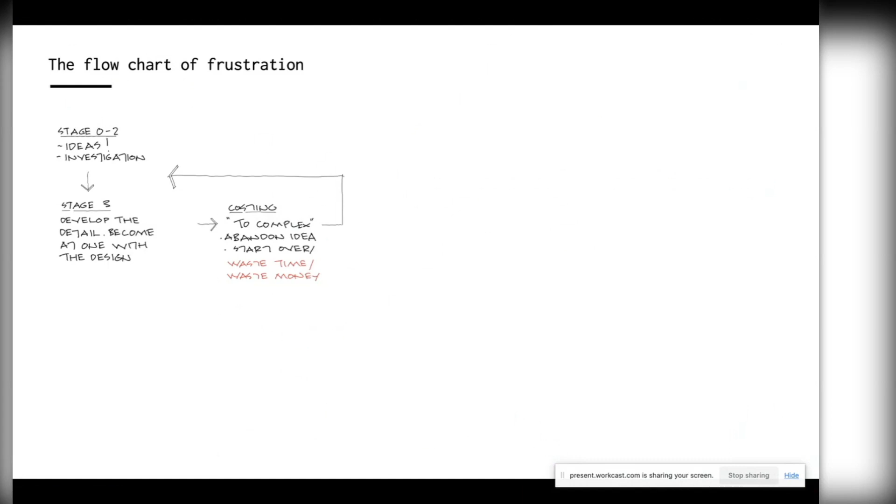At that stage, you often find a project will go for costing, for example. It doesn't matter who costs it or what organization or background, but there are many examples where people will say, 'Oh, it's too complicated, we haven't really explained your ideas, it's too complicated.' You have to abandon the idea and start over, which is a waste of time, a waste of money. But if you go past that stage to stage 4, you then have a deep familiarity with design.

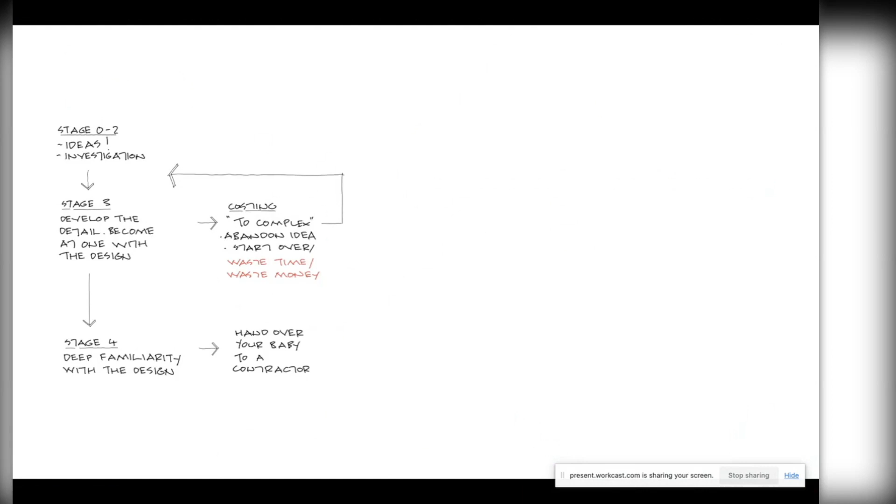At that stage, you hand over your baby to a contractor. So here are some of our pet peeves. A poor contractor will spend time relearning the design, he'll replicate any 3D model you've pulled together, there'll be questions, there'll be the inevitable wait for answers, we'll spend ages checking the contractor's model. You'll get comments such as, 'I don't have Rhino, can I have PDFs, please?'

Which is a waste of time and a waste of money. You get the same - it's too complicated, you have to abandon the idea and start over again. Once you've gone through all those hurdles, even if you manage to convince somebody with the sheer force of will that this is buildable and it is possible, you get to build it.

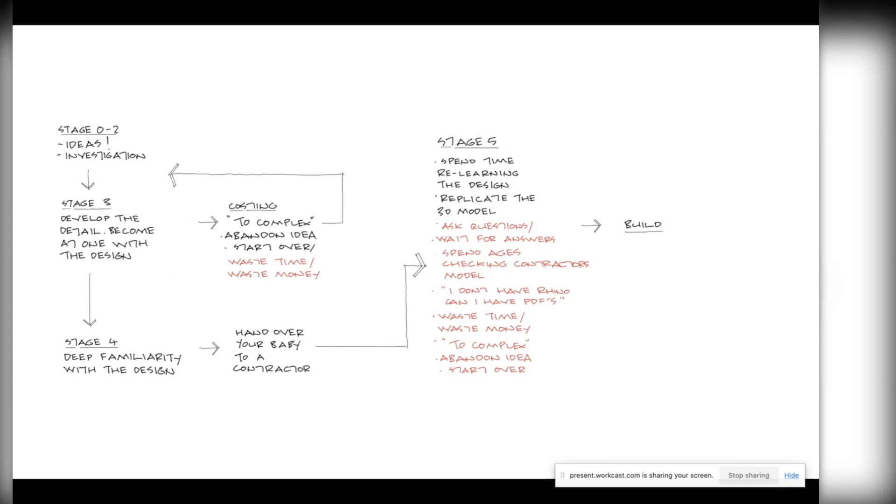But then you get the further complication on some projects where people say, 'But I'm not a contractor, I'm a self-build, or we're only students, or I have very little money.' So there are all sorts of hurdles where the traditional way of doing things slightly falls down - the traditional way of engineers producing information, handing it over, and then expecting a contractor to absorb that very quickly these days, and then to produce fabrication information which reflects your design intent.

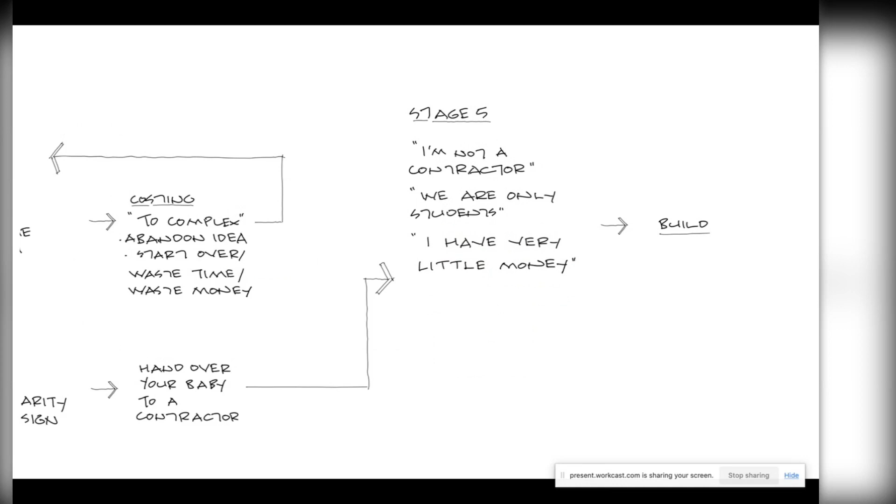So that's why we think democratization of building, through the application of technology, means the pitfalls that you see later on in the design process can be ironed out. I'll start by talking about some more funky digital projects, which explain some of the concepts, get those out of the way.

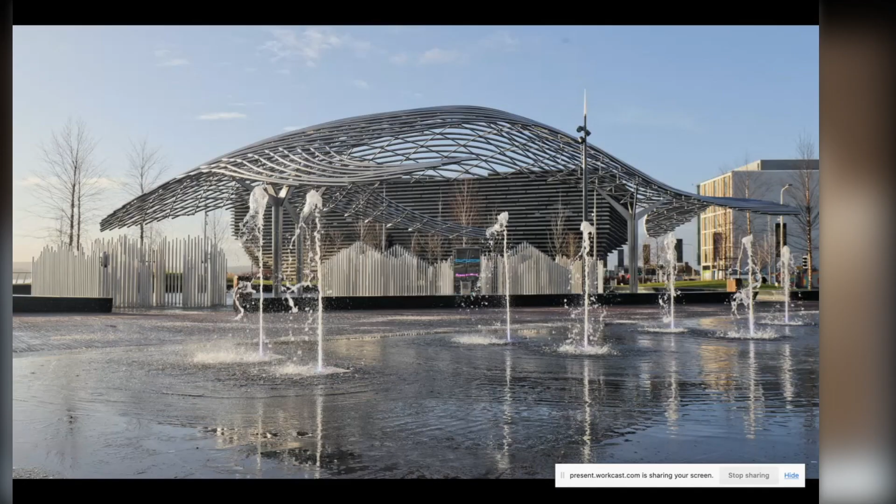One project we were involved with last year - this is the Tay Whale for an artist called Lee Simmons, in Dundee, opposite the Victoria and Albert Museum. These are examples of projects where you're working for a client body that does have money, and a contractor who is au fait with some of these techniques. I wouldn't say they're no-expense-spared projects, but these are the big profile, or high profile, design projects.

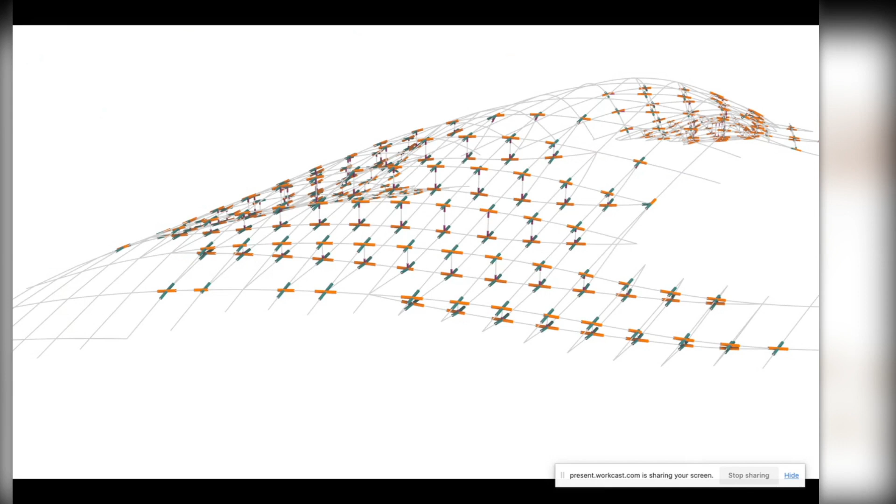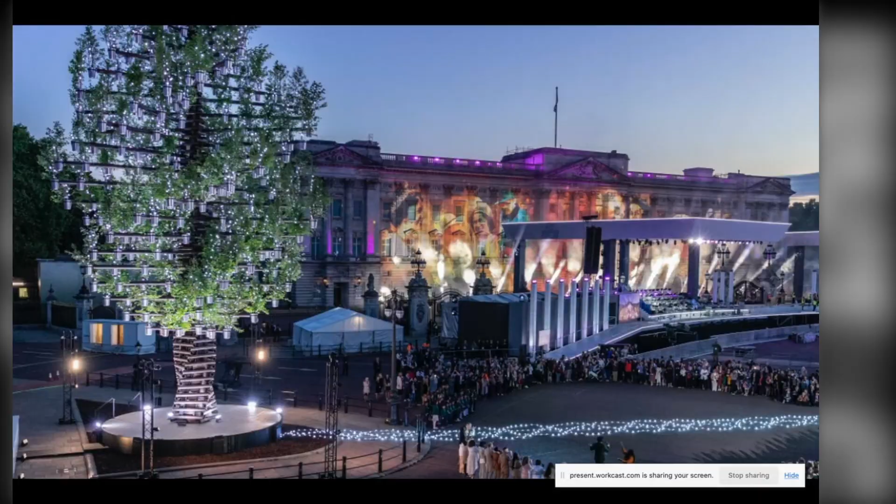Another example of a complicated project where techniques that have been learned feed into the everyday and enable this democratization was a project we were lucky enough to be involved with for the Queen's Jubilee last year, the Tree of Trees for designer Thomas Heatherwick, which was the primary beacon across the country, lit by the Queen, went around the country, and then the Tree of Trees was lit up at the end.

It was a very fast-paced project. It involved lots of computational techniques to prove it stood up in the time, but also to enable us to produce the information that the contractor could build with very quickly. So we produced all the cutting files and the 3D elements from our model that the contractor then used to actually cut the elements that went into the structure.

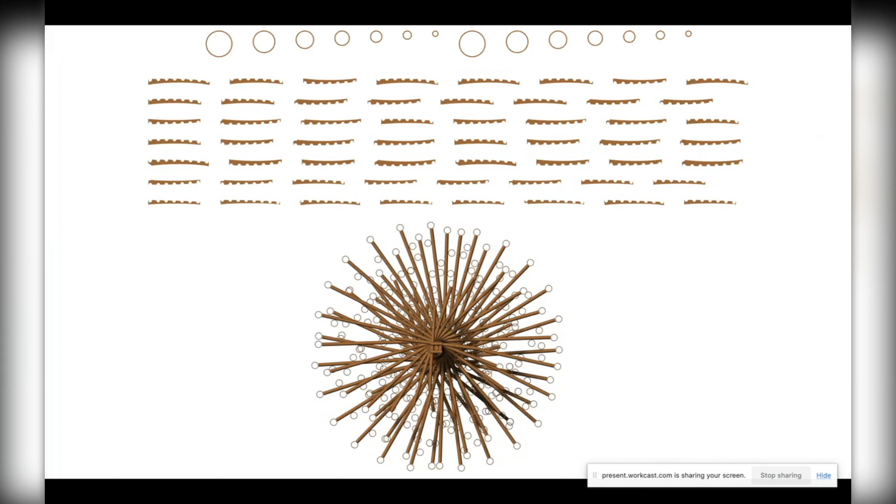There's the fabrication as well. And this is a great example where you have to do this sort of thing sometimes - we think, and we're quite prepared to do this sort of thing, when the deadlines are extremely tight.

Another example - not unlimited budget, but a project with a certain budget and an experienced contractor, which was still extremely difficult to build, and where we learned a lot, was Goodwood Festival of Speed in 2022, which has the proud boast of being the world's longest tensegrity cantilever. We had a matter of 3 months to actually come up with a design and build it.

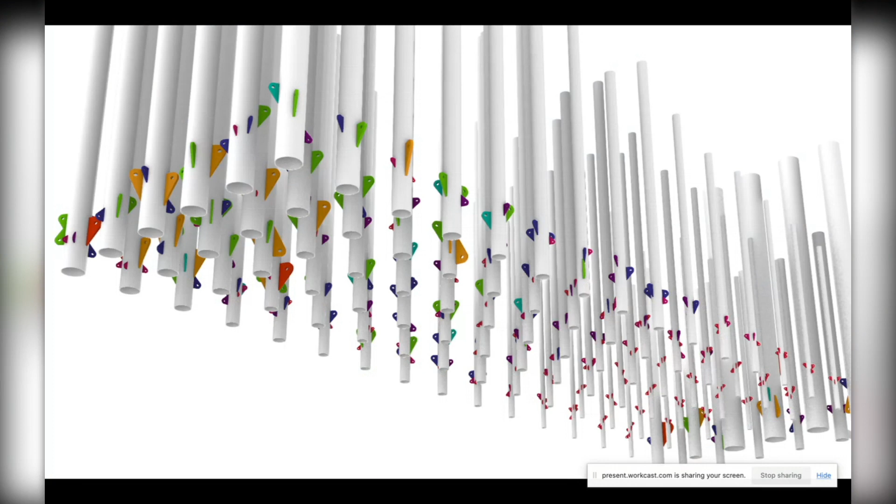So the full array of digital techniques we use - every single connection was designed automatically within one computer script. All the fabrication drawings were exported by us from our 3D model, again using a single computer script, all of which saved the contractor a huge amount of time.

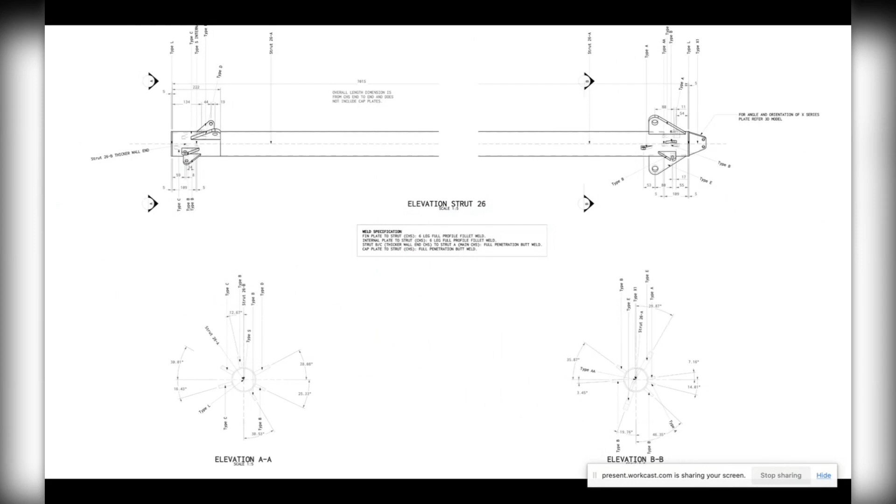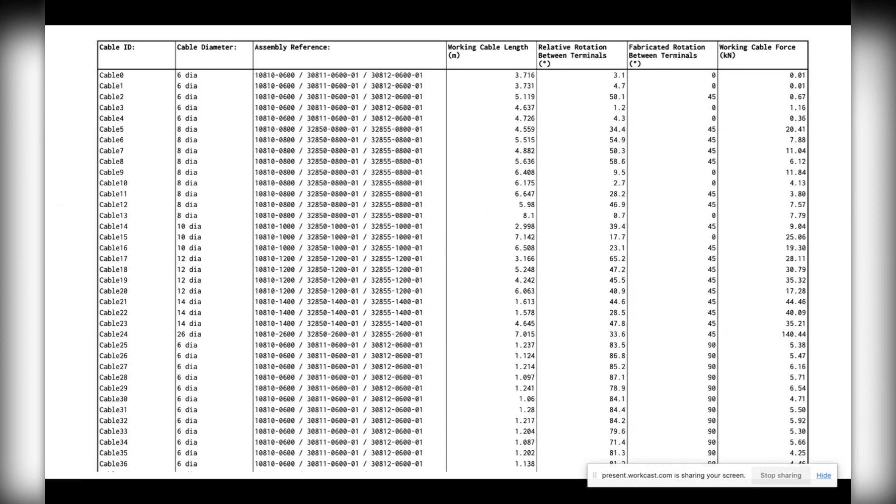Every plate element was labeled and automatically exported. Every cable, again, was labeled and then automatically exported to the contractor.

These are all techniques that we've really got a handle of, I think, which are absolutely necessary in the design and delivery of some of these quite complicated projects. So there's been a real investment in computational design, and it really pays off from that respect.

And then just a quick description about some of the tools that we use. The ubiquitous one is the 3D modeling software Rhino with the parametric modeling plugin Grasshopper. This has pretty much become, I suppose, the common language of engineering computational design.

There are people out there who hold other platforms do an equally good job - they may or may not be right, but this is, I suppose, the common platform that allows us to develop 3D models, to plug in real-world physics, to plug in nesting software for CNC cutters, to manipulate geometry to make it simpler, to include structural analysis within the model to get instant feedback of how things react when you make changes to geometry. So if those of you who haven't delved into the world of Rhino and Grasshopper, I recommend you do, because it's initially quite an overwhelming world, but it's one which does actually pay off.

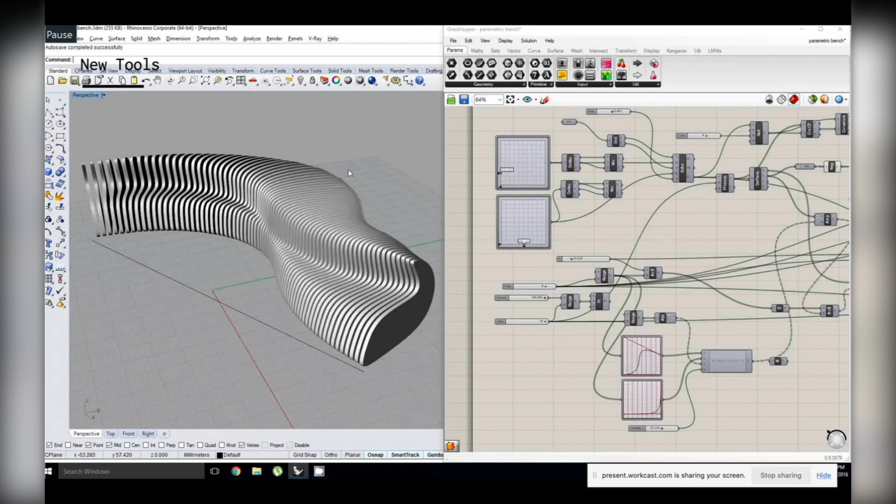The advent of relatively cheap and cheerful CNC cutting machinery or simple laser cutting - Ashley and I were talking about this before this presentation, about how easy it is now to get 3D printing and CNC cutting on a small scale that people could actually use to produce viable, useful elements of a structure. So part of our role is then to say, how can we take the design that we produce and turn it into small elements that the man down the street in the warehouse who has a CNC cutter can produce? And then you assemble those elements into what could be quite a complicated or unusual structure.

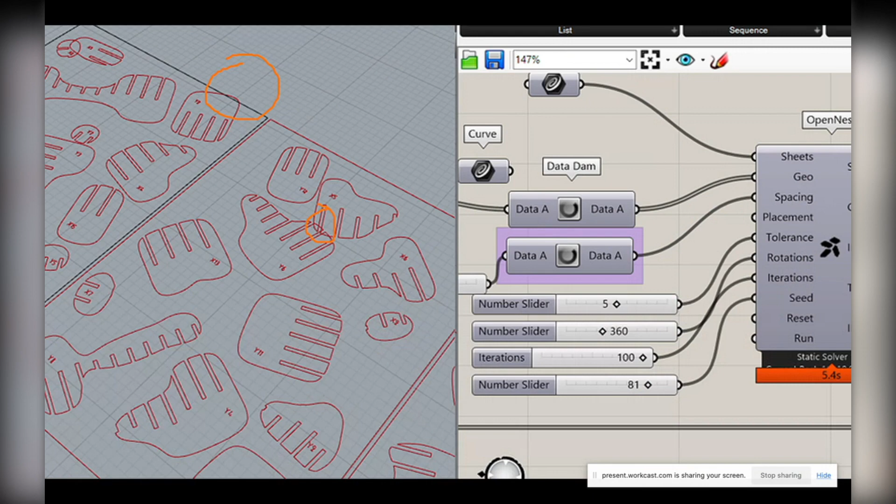So it's embracing the maker's movement, the small scale local manufacturing. I talked about nesting - this means that we can take elements from the design and put them on the sheets, then send it to the CNC chap, who can produce the elements himself, and then we can literally take them to site and assemble them ourselves.

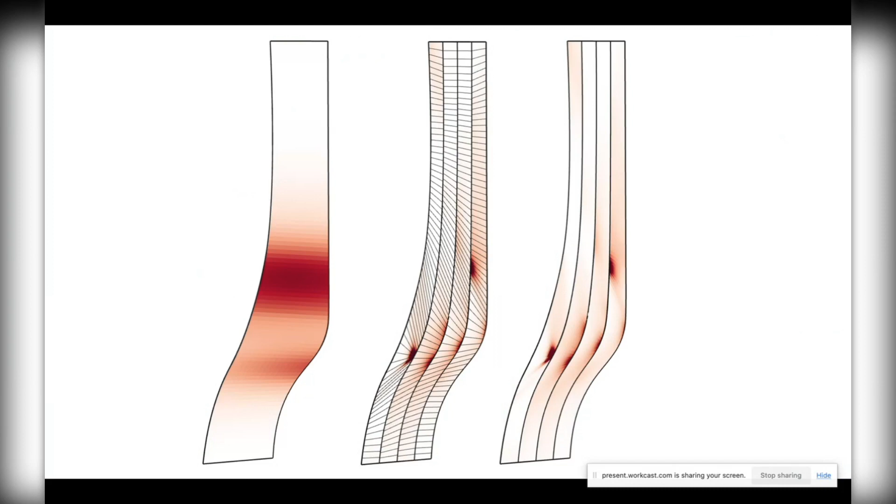Essentially it means using the power of digital modeling and computational techniques to take surfaces which, in this case, double curved on the left - the pattern shows the degree of curvature - and split it into simple flat elements that represent that double curvature, that don't require the services of a shipyard or a boat builder to make a complex three-dimensional form. They can be split into simple parts that the chap down the road with his CNC cutter can produce, and then we can bend them about one axis and fit them together, and the shape of the pieces means they come together in a way that quite accurately represents the double curved surface.

This was an actual project we were working on for the Qatar World Cup. The architect's original intention was this double curved surface at the back of the structure, where it became obvious that the budget was too low and the time too short to go out to a Dutch shipbuilder, for example, to procure double curved plates. So how can we split that double curved surface into flat strips, or strips bent about one axis, which then pull together a pretty good representation of the original three-dimensional form.

That was the final structure. We're still trying to get photographs at the back, which is really the funky sculptural part. But it made the difference between this building being built or not.

So again, this is an example of a quite well-funded project. But again, it's an example of how it wouldn't have been possible to do this very interesting double curve geometry if we hadn't been able to prove it could be done for a relatively low budget.

We did the same thing for a work of art in Marble Arch in London, where we took the artist's original intent - the artist being Lee Simmons - of double curving stainless steel plates which whooshed out to the ground in a sort of plant-like form. But the original was too costly, it couldn't have been built - it was double curving on those plates, super expensive. So again we've broken everything down into single curved elements cut from flat sheet, which again made the difference between it being built or not.

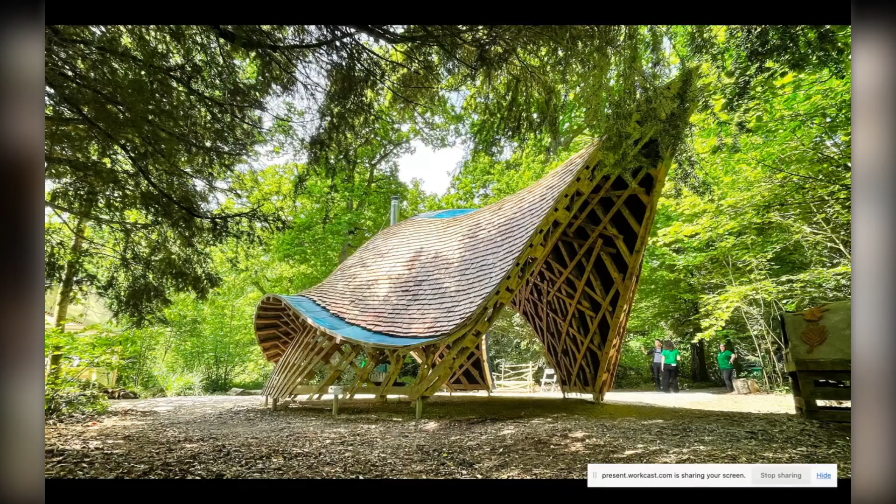So to show this in action, I'll go through a series of projects, if I may - some very quick examples, recent examples.

This is Westonbirt Arboretum with architect Piers Taylor, where again it's a complex form - elements which are bent and steam bent - and then the community comes together: local schools, local action groups came together to help build this structure. The guidance they were given and the elements themselves were all split into simple steps and simple components using our 3D models and the tools we had, so a non-experienced, non-professional contractor could contribute to the build of this project. We were in charge of producing those elements, or collaborating in producing them.

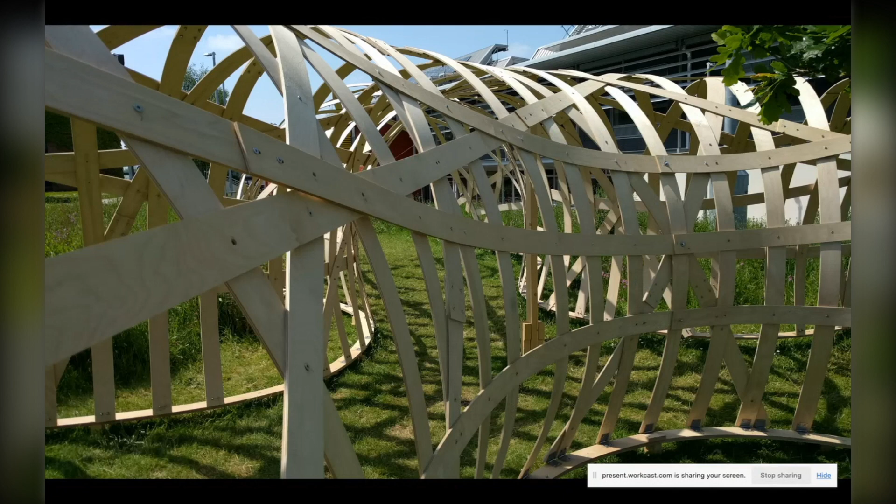That built on the work of a smaller scale project a couple of years ago at the University of West of England, where a relatively funky three-dimensional curved shell form was designed by architecture students for their end of year show. But they only had a very limited budget - they could afford a saw, they could afford some bolts, and they could afford some 6mm ply, only in flat strips.

But we were able to develop software which broke down that curved surface into those flat strips, which when bent and pulled together and then connected with bolts would form this really interesting double curved surface.

So they were able to do this for the end of year show. It was tremendously successful. It went a bit saggy after a few months, but it's not meant to be up for that long. But it's a great example of what you can do with the budget if you're prepared to do a little bit more as engineers, working with the digital tools you have.

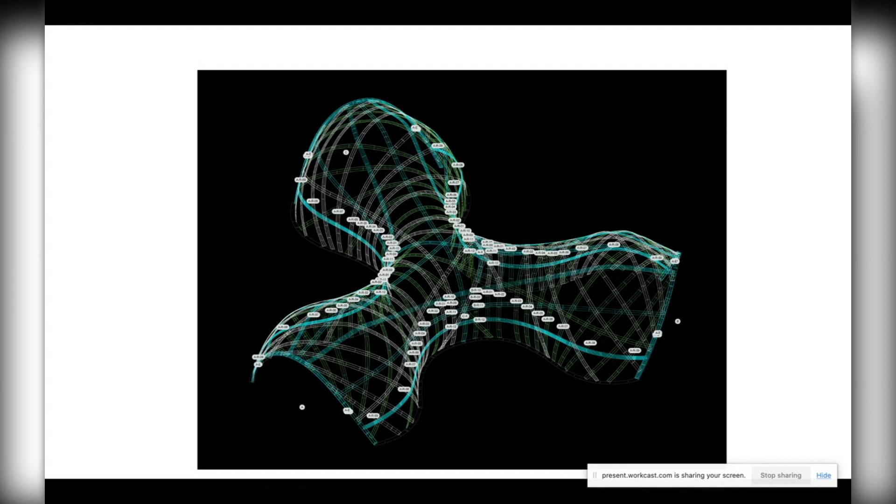We are working with a very enlightened concrete contractor in the west of England. I should say calling him a concrete contractor isn't really a fair description - he's actually a waste-to-energy supplier who owns a concrete company, and he's looking to develop concrete shells around his waste-to-energy plant in order to house workshops, production facilities, or growing tomatoes, using the spare heat from the plant.

So as a prototype for one of the concrete shells, we've worked with him defining literally clay molds from the ground that make the shell, and using augmented reality to set up the reinforcement in the shell.

Although he owns a concrete contractor, the contractor itself is a very traditional organization, used to beams, columns, and slabs. So presented with a series of concrete shells, it's a massive learning process for them.

Being able to set up the model in augmented reality showed them where the reinforcement should be. This was also reinforced with a textile reinforcement to show them where that should go. And before that, showing them how to shape the clay, the earth mold that makes this shell, was a fantastic learning experience for us and for them.

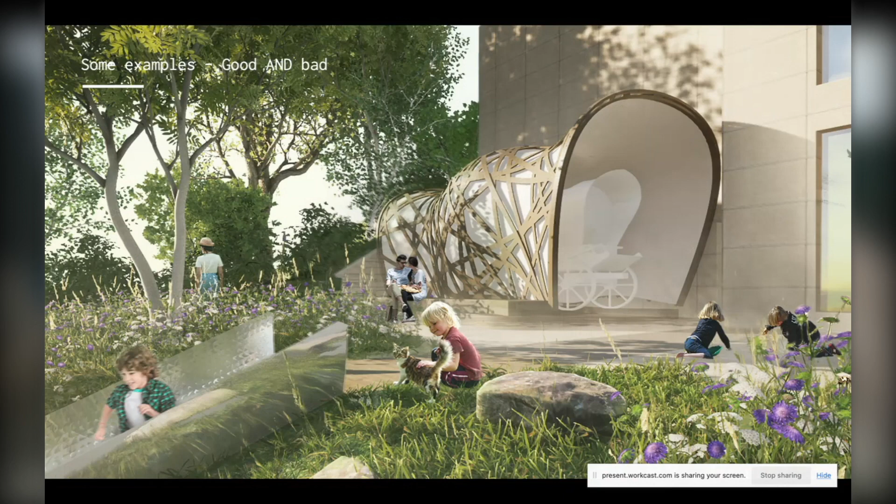So that's a snapshot of some more grounded projects. I was a little bit more controversial and go from examples of good projects and bad projects, because I think the flowchart of frustrations is all very well, and going out and pushing scope as an engineer is all very well, but actually there are some bad outcomes to this, or there can be, and there are some things to watch out for, some things we've learned along the way.

So there are some good examples and some bad examples. And I'll do this as a series of projects again, because I think this is best illustrated by real-world projects.

Now I talked about grounded projects - this is a typical grounded project. This is an extension to a house. Admittedly it's for a member of the aristocracy in a very expensive village somewhere in the southwest, but it's an extension to a house. The architect wanted some quite unusual angles.

It was very difficult to actually deliver the elements for the build through a very tight series of alleyways behind the site. So it all had to be split into small components, and also the contract was held to a very tight budget. So there's a rear view of the extension.

The approach was to break it down into a series of frames - hybrid plain sawn timber plywood portal frames, which were then clad in a more conventional timber frame. We developed the 3D model, which was actually an output from our analysis, so we developed this into a solid 3D model. We then generated the cutting patterns for the ply elements that sheathe the outsides of the portal frames, and then we gave the contractor a set of instructions on how to put this together.

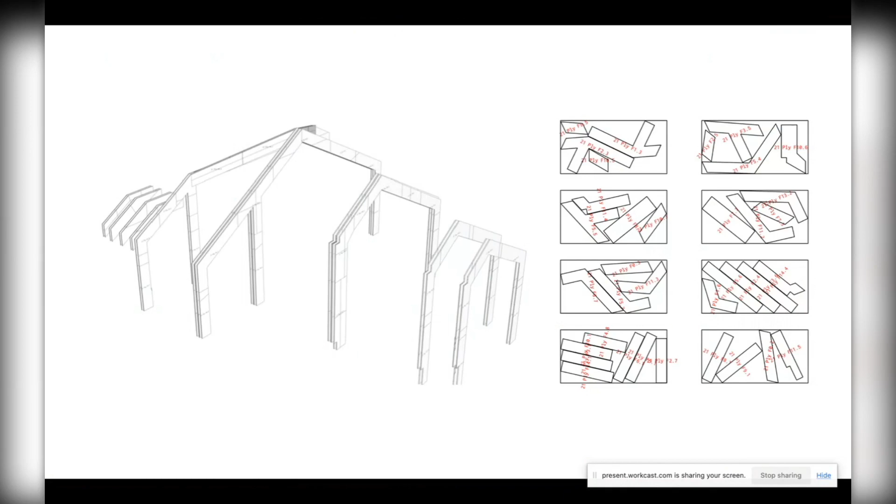And I think this is a good example. There was a contractor - we didn't have the frustration at stage 5 of someone saying 'I don't have any money, I'm not a contractor, I'm just a student.' There was a contractor, but he was able to get this built extremely quickly because we were working with him, going further than the traditional scope for an engineer. There's a picture of it being built.

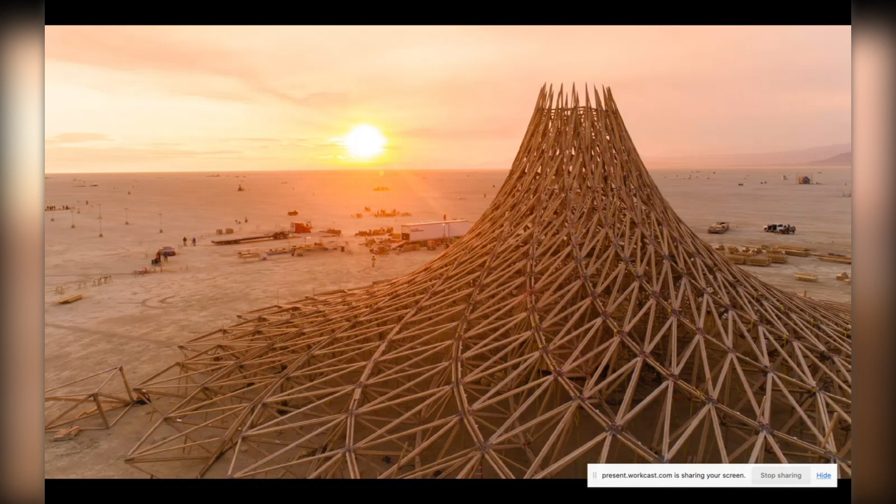Another example, one that I may have used before in presentations, but it's a good example of democracy and, in some ways, the ultimate example of democratization and building in a social sense. This is a central temple for Burning Man in 2018, a structure called Galaxia by architect Arthur Mamou-Mani.

I don't know if people are aware of the Burning Man festival, but people come from across the world, take lots of drugs, hang out, take all their clothes off and run around naked, as far as I can tell. But it's a spiritual space, and you're meant to leave the desert untouched. There isn't the traditional contractors and people with huge machinery helping you build these things. You've got to build them yourselves.

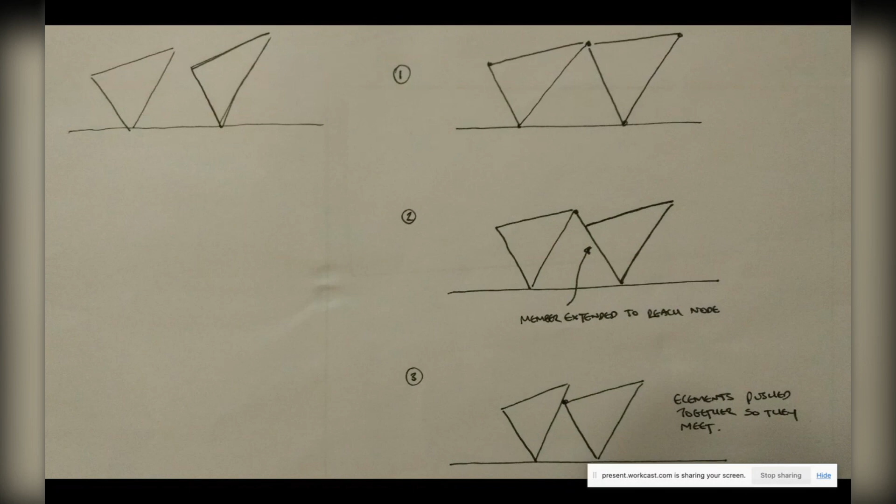So this tremendous structure, which is 50 meters clear span, a spiraling tent-like structure, had to be built with literally inexperienced volunteer labor. We went for an exercise of really splitting this down to quite simple elements - triangles, prefabricated triangles which could be connected together. Really, what could they produce in a cutting shop without a contractor leaning over them for help? So really simple triangles connected together in a simple way.

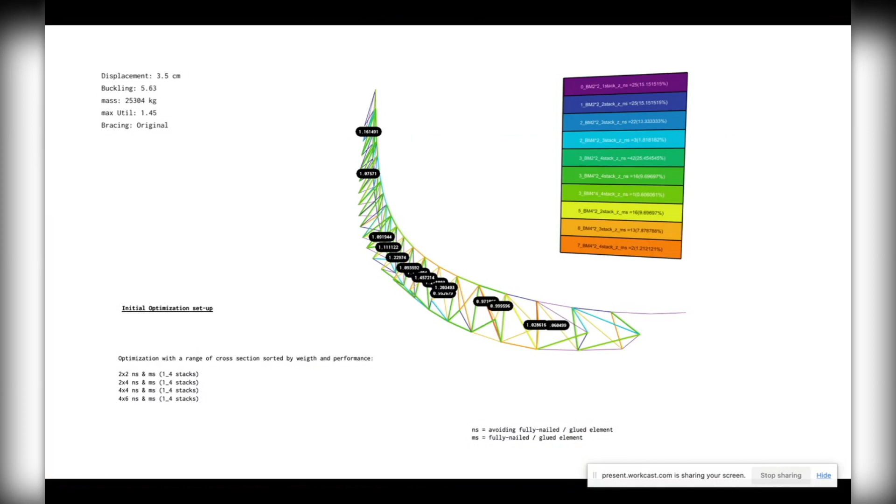We did loads of engineering optimization, which split it into different elements and different sizes in order to reduce the material - the sort of thing we like doing. Actually, in this case, it was a bit useless because it meant the elements were all different. So a better approach was to use as few different sizes as possible, have more repetition, so it was easier to build. We ended up with literally just 2 sizes of timber, arranged in the best way we could.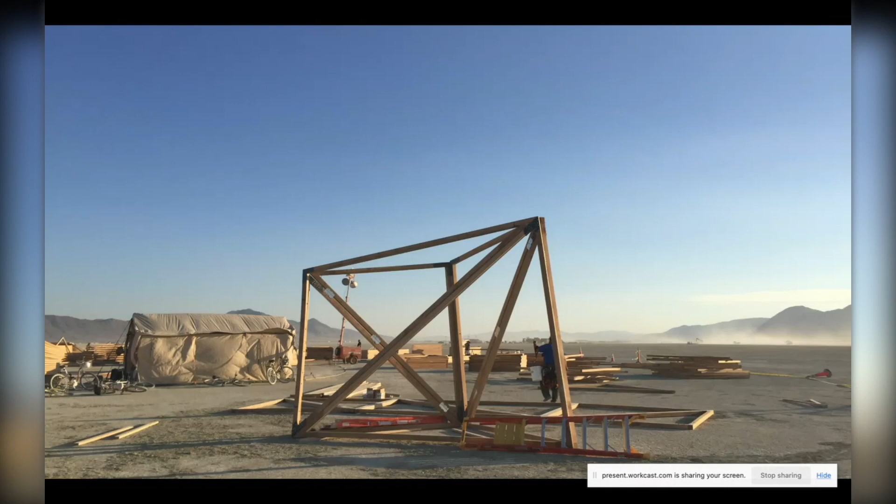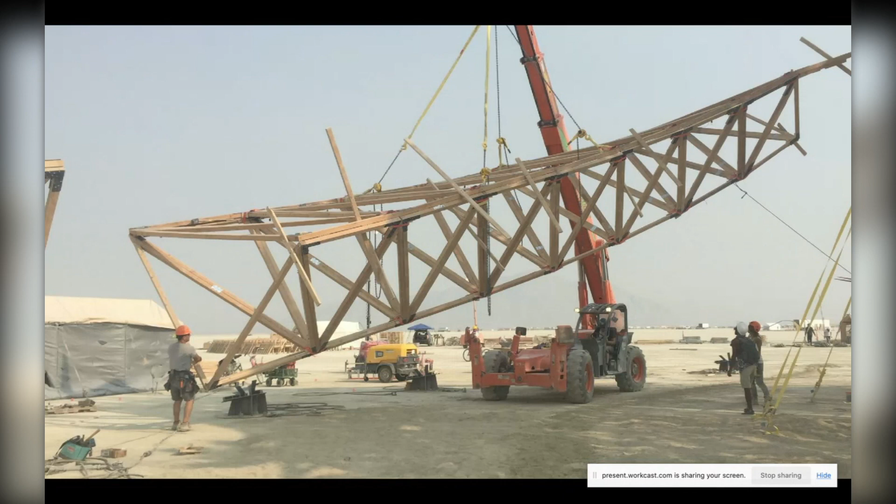So fabrication started, and this is the desert - you can see the concept of the triangles bolted together. They built the banana trusses, and this was some of the few pieces of kit they did have - these long spiraling banana trusses - and they did it. So this was volunteer labor.

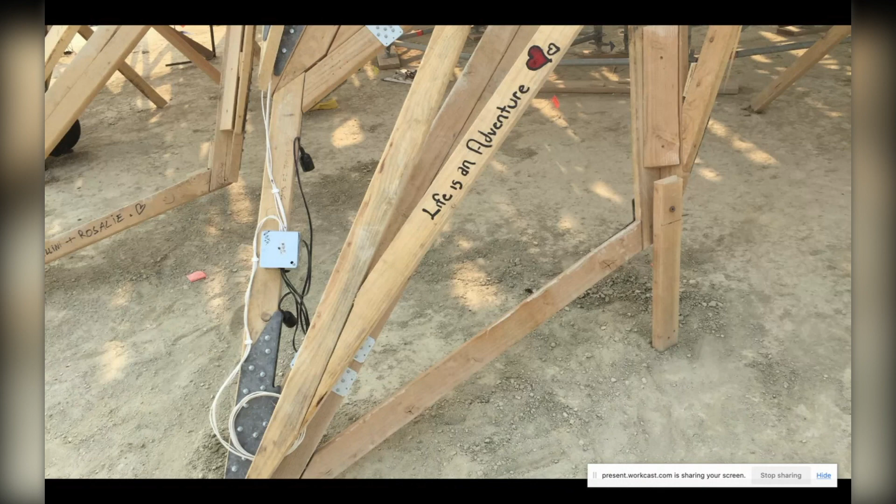This was architecture students, people from Google, people from Boeing - people who hadn't had any building experience, but were able to build this tremendous structure. People left dedications to loved ones, messages. It's a very spiritual space.

You can see the top part of the structure is built first. Maybe they should have used some experienced contractors at this stage, but they did it. So here's the team that did it. This is the ultimate example of social building.

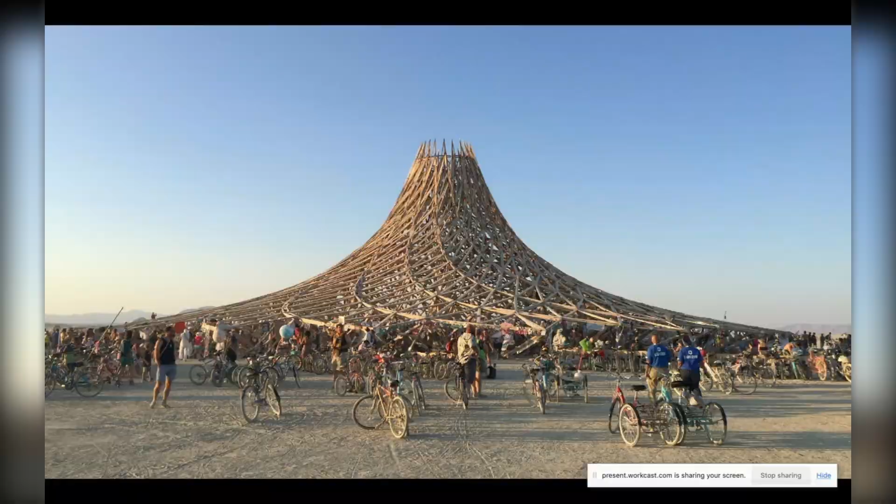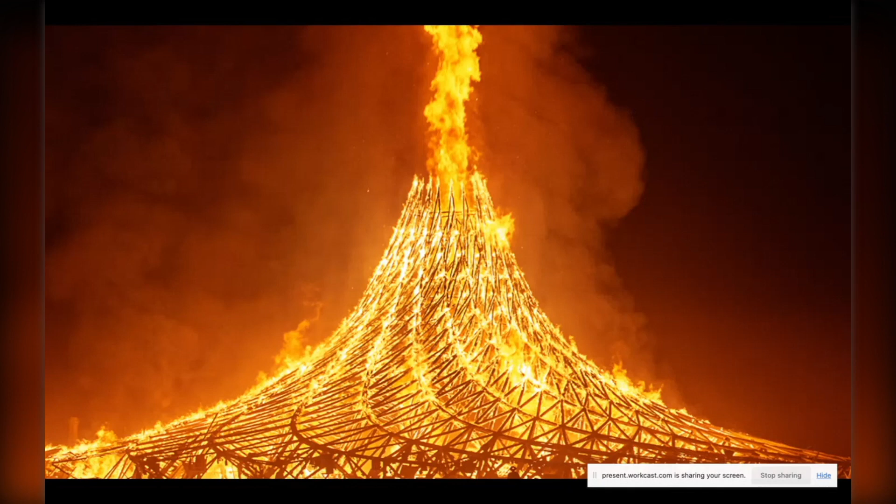Looks tremendous. Looked tremendous. The inside looked amazing as well. There was a great spiritual space. And I say 'looked' a lot because the story is it took us months to design it, it took them a month to build it, and it was up for 4 or 5 days, and then they burnt it, leaving no trace. So it was something which made a mark, but not a permanent one upon the desert.

Another example - I'll rattle off a few good examples, and I'll talk about the bad examples. This is the steampunk central structure for the Architecture Biennale in Estonia. Fantastic swirling, interlocking structure - that was the original architect's vision.

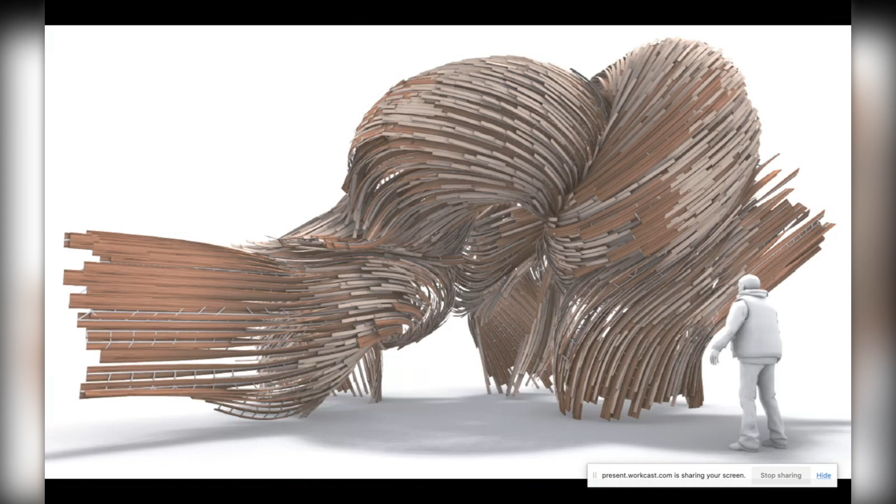It's a bunch of architects from the Bartlett School of Architecture who teamed up with the same augmented reality people I talked about before, Fologram from Australia. So it was their joint design. There's all the normal 3D modeling and structural analysis, but what was really clear is this couldn't be built.

Again, it couldn't be built by a contractor because there was no budget for a contractor, and it couldn't be built by a contractor because it was too unusual for a conventional contractor to understand. So the way it was built was using one of these primarily - this is a Microsoft HoloLens.

This is an augmented reality set which flips over your head, and you can see the real world in relation to the 3D model. So you can see what you're trying to achieve when you fabricate something in relation to the real world. So here's an example of that.

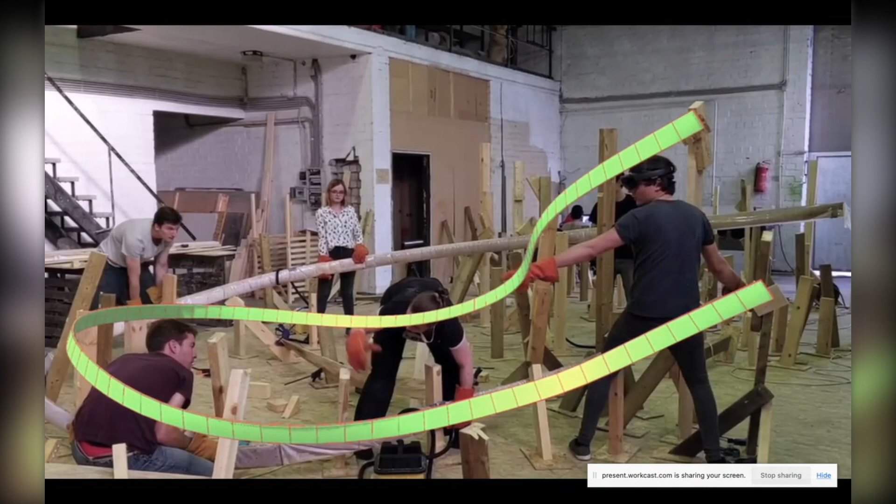Here's an example of the timbers which made up the structure, which needed to be steam bent. Here's them being steam bent and pulled into the right position. That kind of greeny-yellow shape is essentially what they're trying to achieve. So the guy with the HoloLens - or rather, the hologram - can say pull left, pull right, to match what they're trying to achieve.

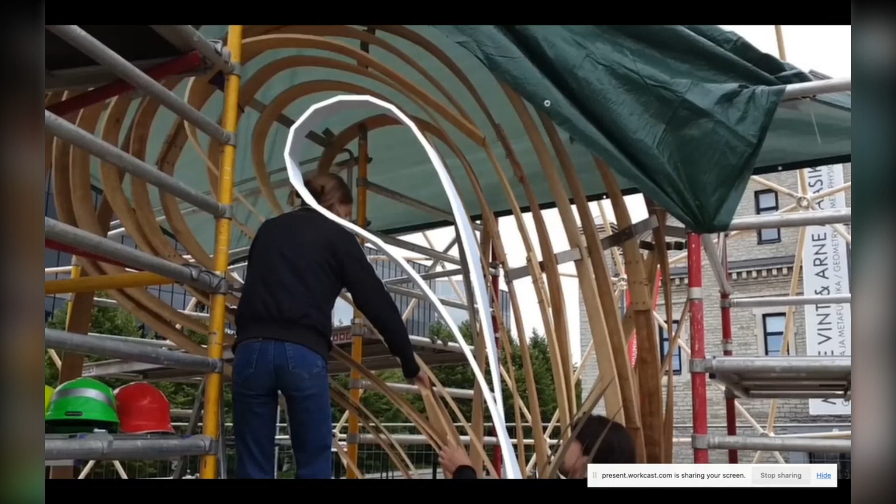And they used the same system on site, so they were able to build this - knowing what element goes where - using the system to great effect. Here's an example of what somebody could see as they were building it. And they did it. This would have been impossible any other way, I think.

So it was a tremendous use of technology, tremendous use of computation, and it was democratic again. This was built by the architects themselves for a very limited budget.

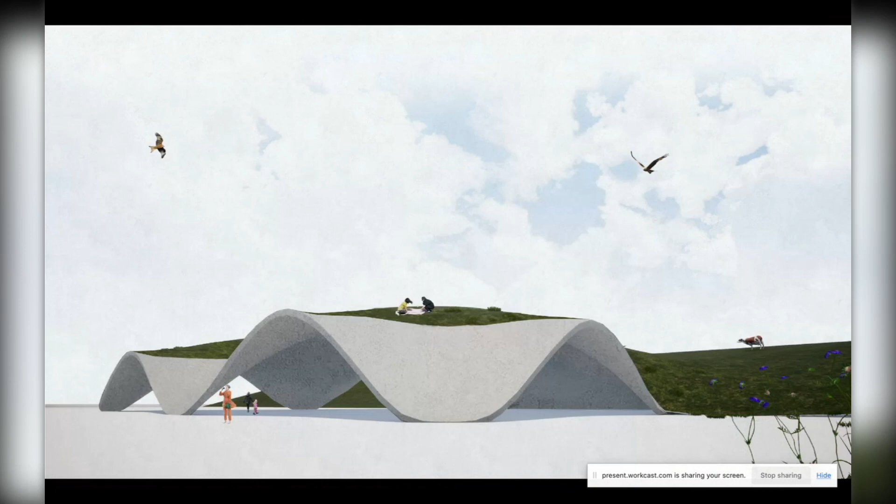An example of a picture. And this has led on to other projects.

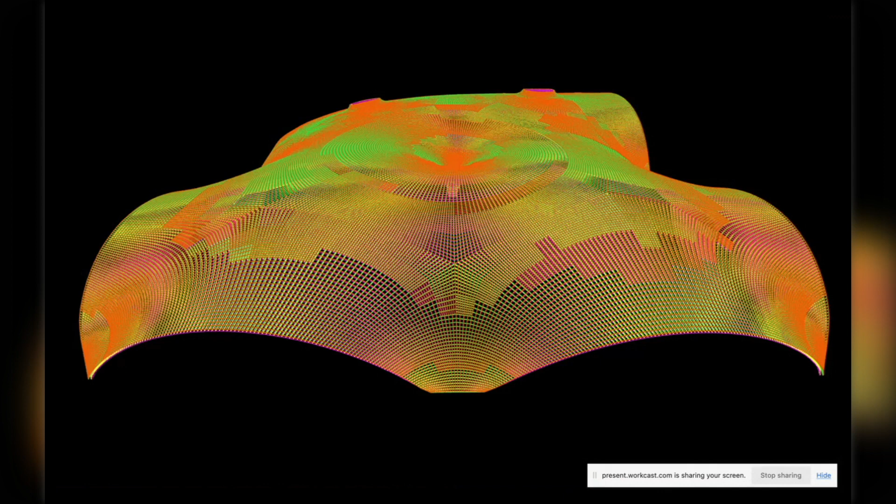I mentioned the concrete shells that we're developing with a contractor energy supplier in the southwest. This is one of the shells. As I said in the prototype, what they want to do is set out the shell, the mold, the clay mold, and the reinforcement. Here's the reinforcement pattern using the augmented reality system.

Another more everyday project, this was a contemporary house in the southwest called Park Cottage. It's up for an RIBA award soon, so we're hoping it gets one, obviously. The centerpiece was this reciprocal Zollinger roof. It's an oak Zollinger roof of very limited length members which interlock to make a robust roof structure.

Some of the comments that we had when we were first showing this to the contractor were along the lines of, why don't you build a steel frame and just hang the timber from the steel frame? And we said, well, no, but that's not what we're trying to do. This structure is, yeah, a robust structure in its own right. We don't need to hang it.

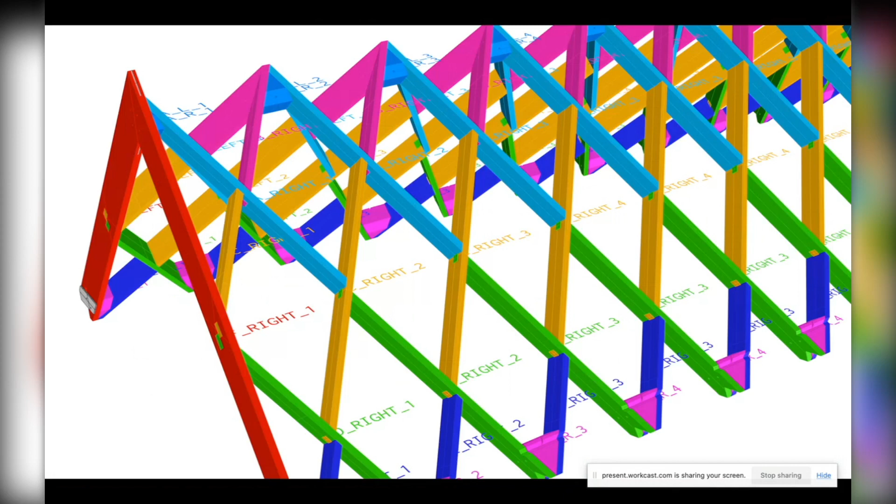So the way we were able to demonstrate to the contractor that this was possible was by taking on the responsibility ourselves as engineers in doing the CNC cutting file generation for the members, the CNC cutting for the plywood panels which sheathe the roof. We developed a full 3D model. All the elements were modeled by us.

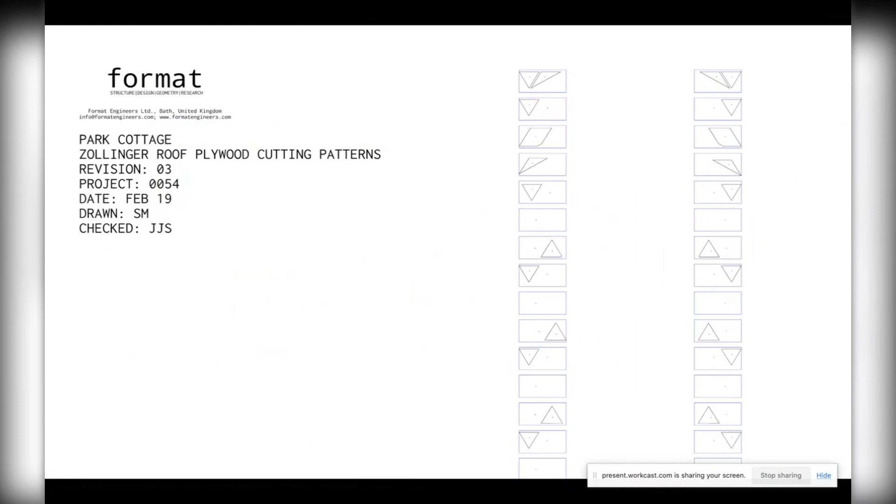All the plywood cutting patterns were generated by us, and this is one of the bad aspects. It's got the world's worst nesting into panels here, complete waste in some ways of plywood, mostly due to the architect's insistence of all the grain lining up in the same direction of the plywood. So it was a very inefficient way of nesting onto plywood sheets. But we did all that. We protested, but we did it.

It was part fabricated off-site, brought to site, crane in position. It all fitted, and it looks fantastic.

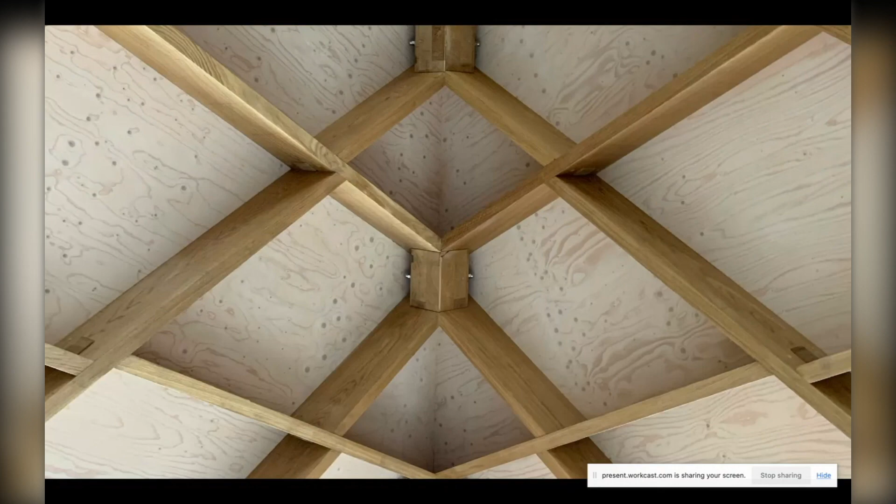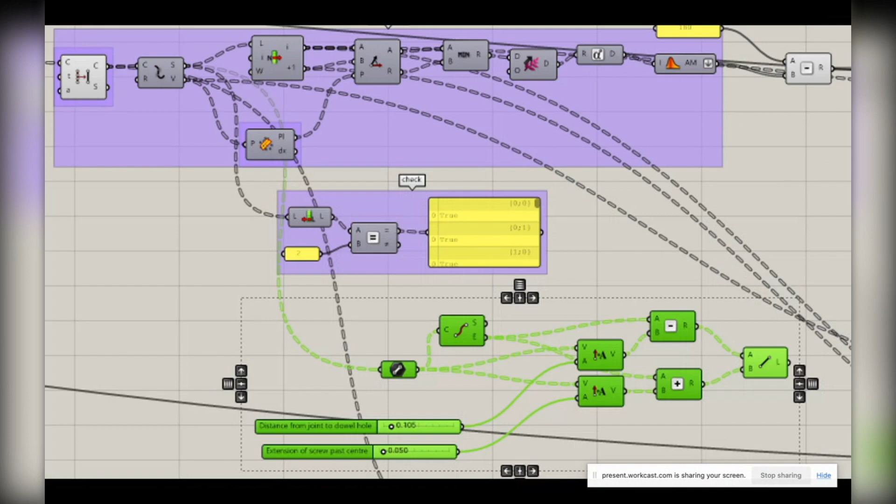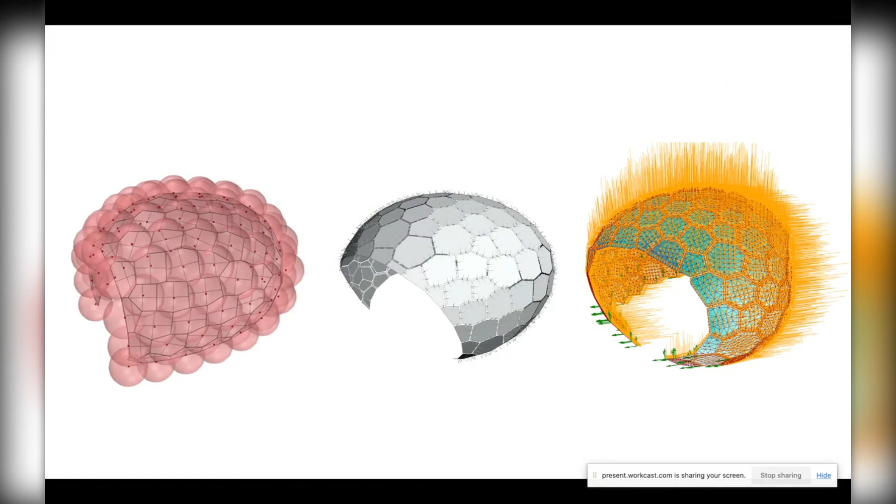Again, this is about computation in the service of democratic building. There was one computer script which generated everything from the panelization geometry to the screw locations to the structure analysis, all done in one model.

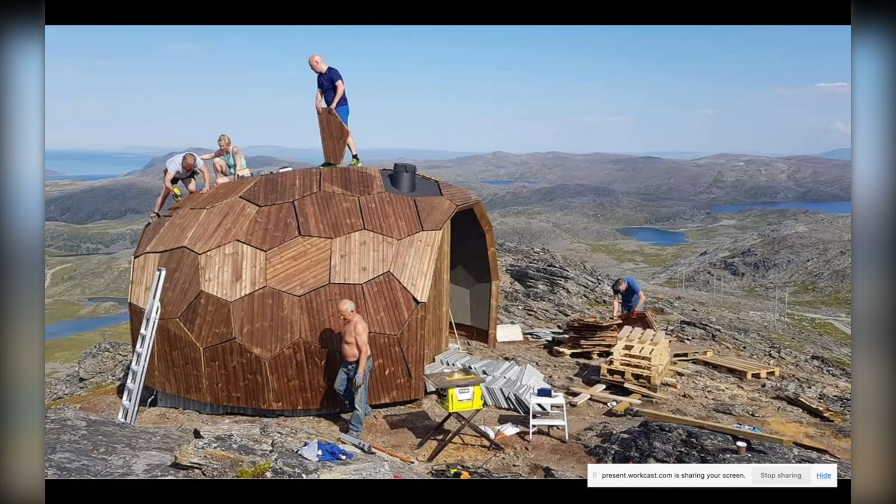The structure was broken down into flat cross-laminated timber panels. These guys, this is the community, were able to actually get them cut themselves and then literally take them to site and build it themselves. So fueled with just cake and enthusiasm, these guys built the first cabin in, I think, a week. And I think they built the second one in 2 or 3 days. So it was a pretty quick and efficient process.

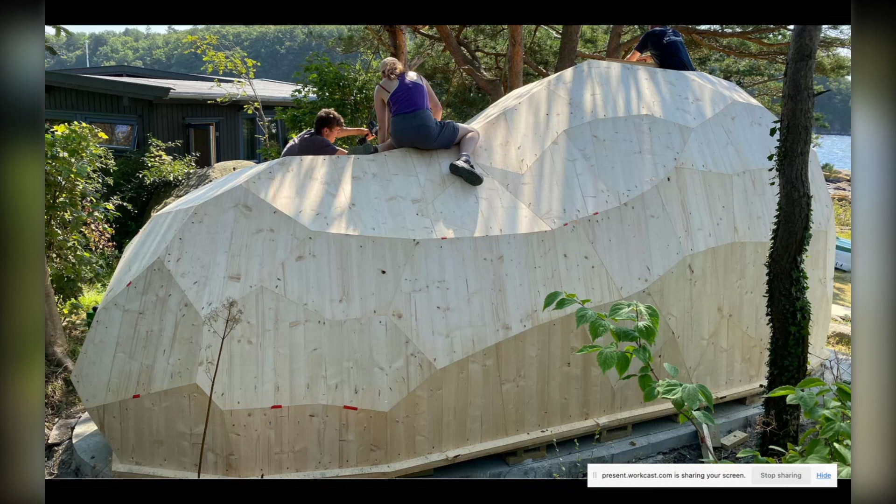And this led to a second cabin, actually. This was more a research project, for an island in a fjord in Norway, which is rarely visited by people. It's a very special island where any works of architecture have to be very heavily scrutinized by the community and signed off. So the intent was to build a really interesting form that worked almost like a pebble, a giant pebble in the landscape.

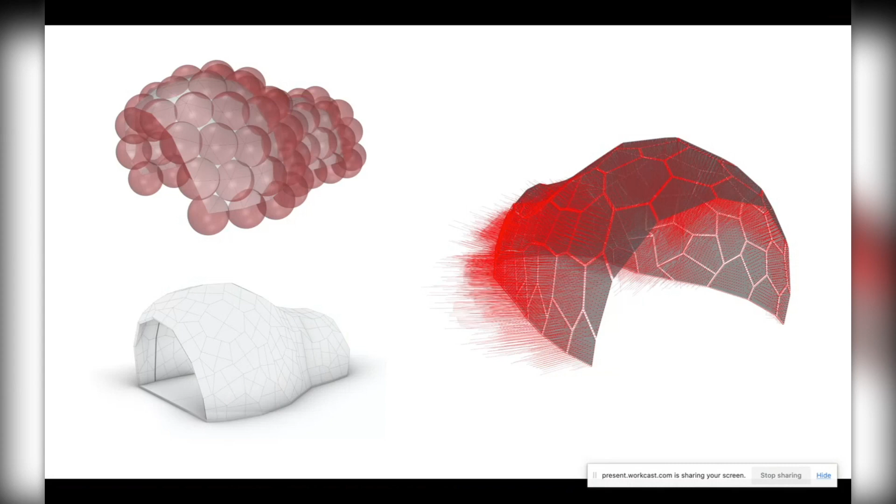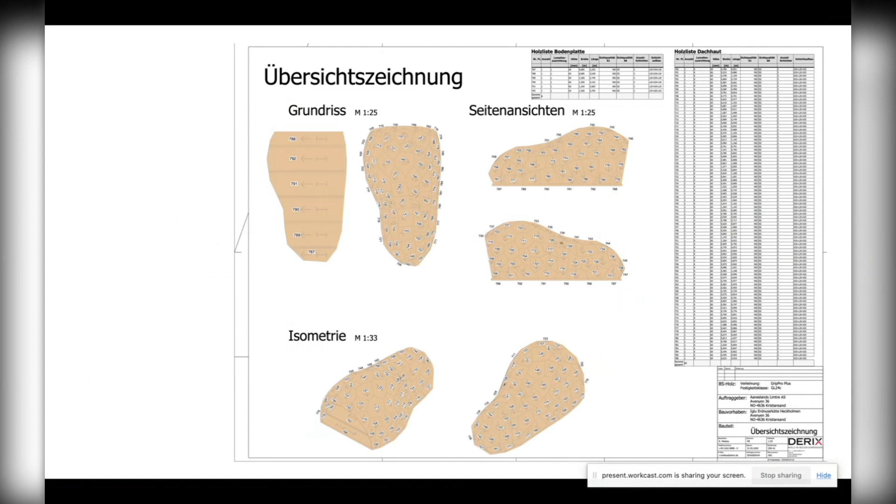So we're adopting the same techniques as we did for the Arctic Circle cabin, of simple, flat, cross-laminated timber panels all linked together. Again, we did the panelization ourselves, we did all the structural analysis ourselves, all that stuff. Our model was then fed into, in this case, a CNC contractor who used our model to export his cutting files. There was a sequence of erection that was then set up from that one model.

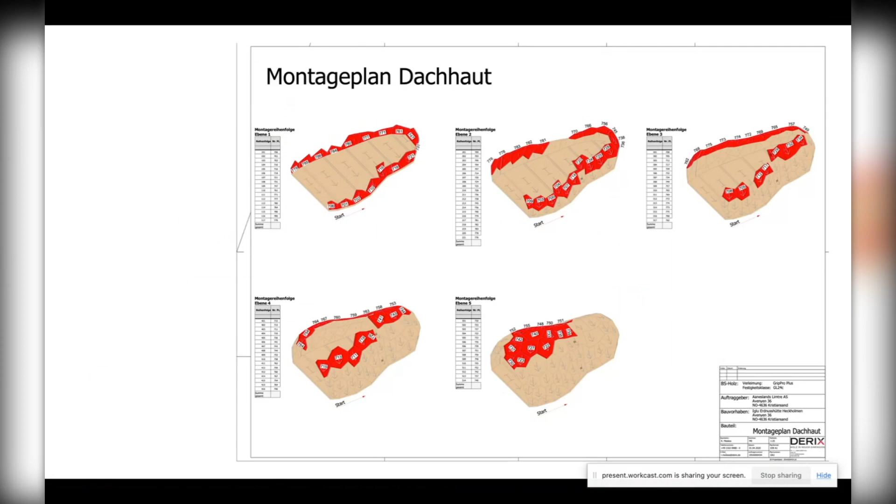One of the learning processes here was that we set out all the screws, but eventually they found they literally could not put the screws in after all. The thing was so rigid that in their view there was no point putting more screws in. Some of the angles and lengths of screws we specified were actually impractical in the real world environment. So there's a learning process of knowing how much people can do and how practical it is to actually plug things together, and feeding that back into the design process, which is quite interesting.

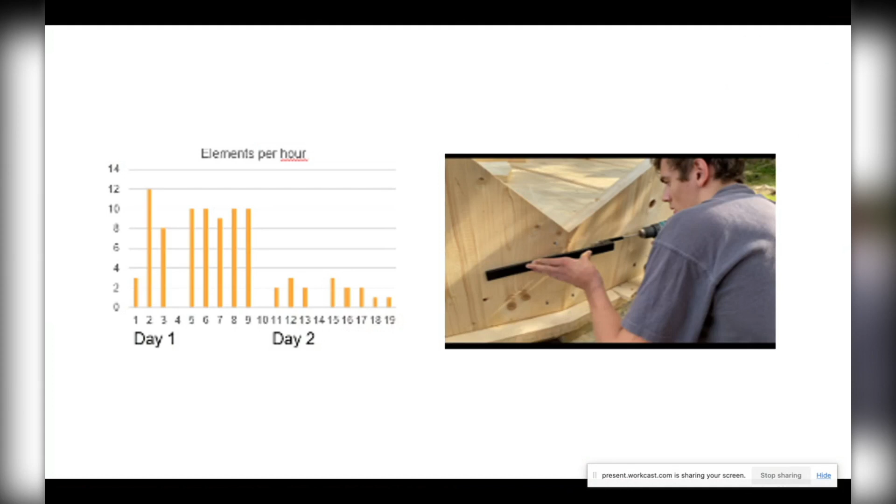View from the inside. Just a couple more and I'm done. This was for an Austrian company called Neuschnee, whose ambition is to produce clean energy snow machines. They asked the local architecture department in Innsbruck to design something to house their snow machine, and if convinced, they would commission it to be built.

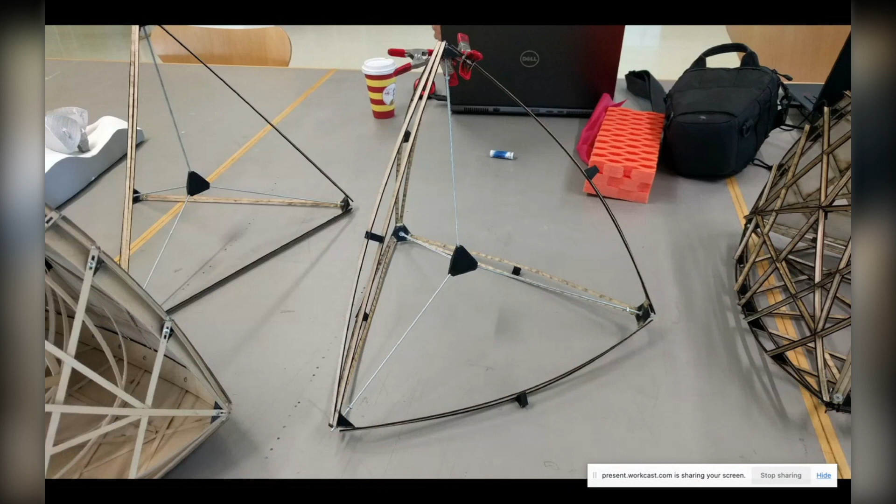The architect's original vision, working with the students, was using tensioned and bent elements to create a form.

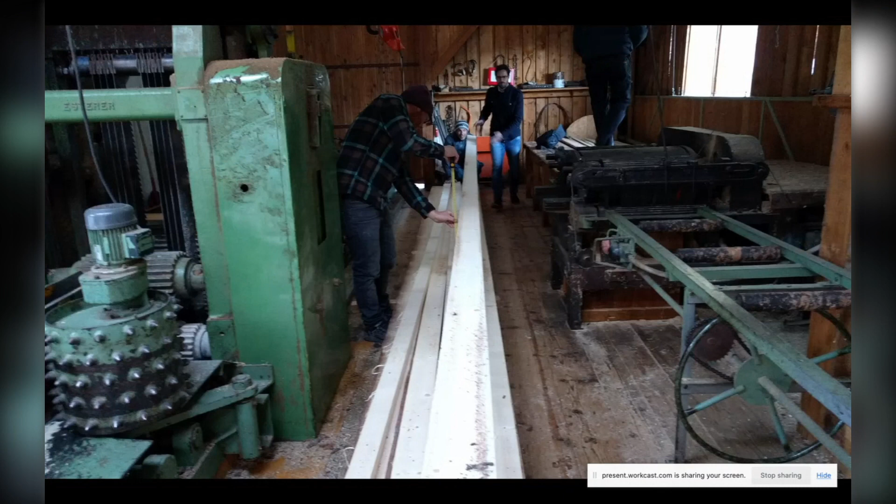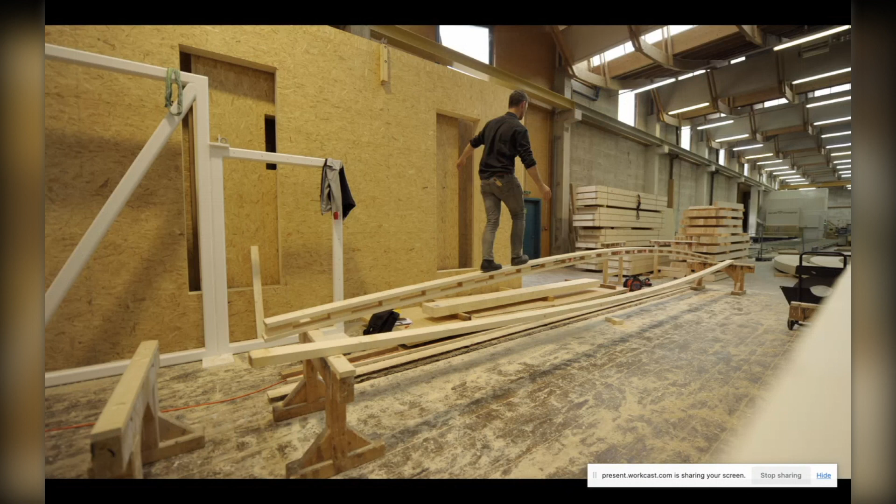It was all hands-on. The cutting of the timber was done locally, by our guys. This is Marco, an ex-employee, holding up pieces of timber and measuring deflection to get a sense of the properties of the timber, then literal testing of the elements when fabricated in a shop, mostly by the architect himself, who was a very hands-on guy.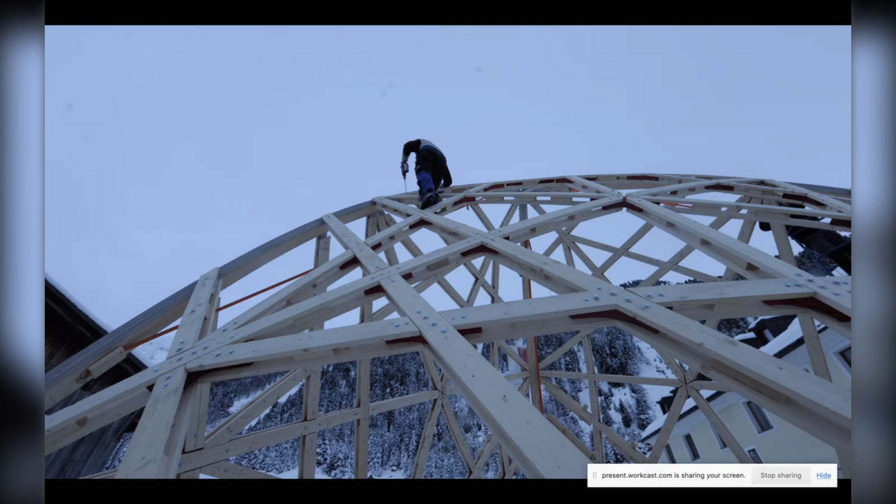It was then built again with students and volunteer labour. I always like the picture of it not clad. And it was clad, finished, and there's Marco being interviewed by Austrian TV.

One more example where things went a little bit awry - this is quite an old structure we were involved with, 10 or 12 years ago, called Creod in London Docklands. Again, the architect wanted to develop this himself. He had this vision of slightly movable, transportable pavilions - reciprocal timber pavilions.

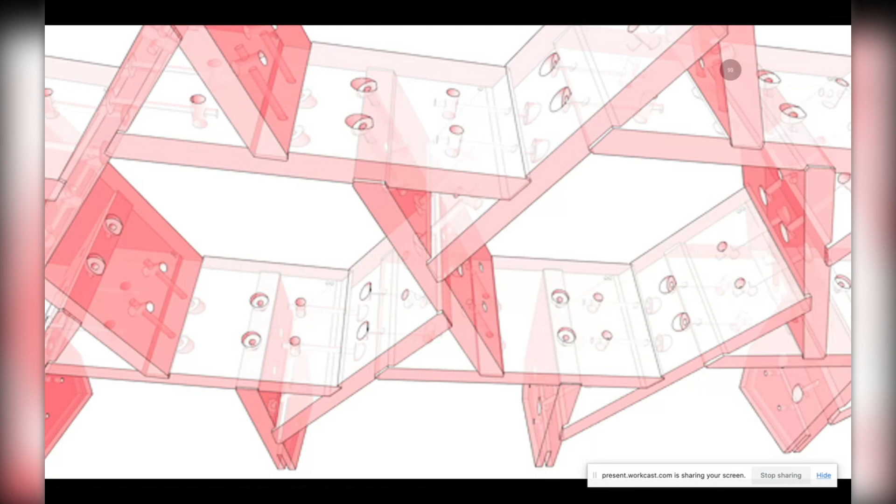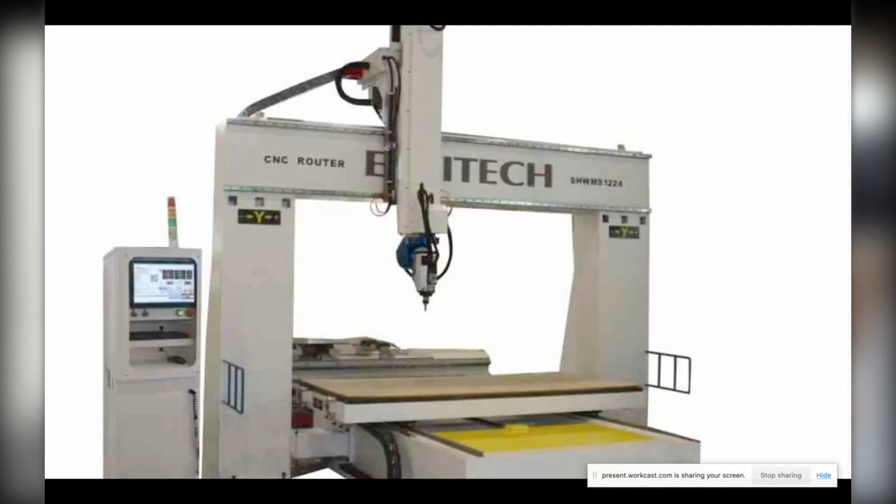The whole thing was 3D modeled, all the connections, everything was in place. It was brilliant in theory. All the pieces were then delivered from the CNC cutting chap, who used, in this case, some reasonably sophisticated machinery.

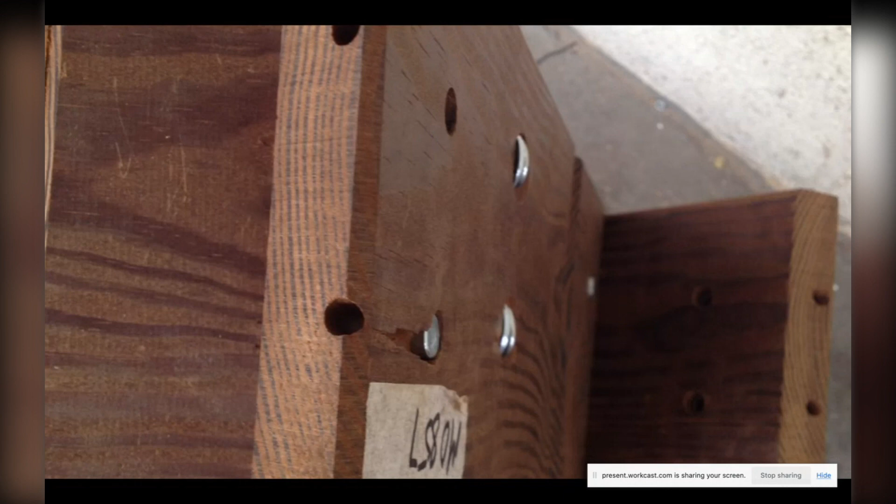But the connections at the end of the timber - every single one was wrong, every single connection was in the wrong place. It was all due to the drill bit in the machine being worn and out of alignment. The architect had to do some extremely fast groveling to get the timber guy to donate more timber and the CNC cutting guy to cut more timber. But they pulled it off. Again, this just shows that you can do all this preparation, but the fantastic machinery at the end can still let you down.

This is definitely my last example, both good and bad I think, wrapped up in one. This is a small residential development, a house that is one of our earliest projects actually, but it's still being built. It's being built by a self-builder.

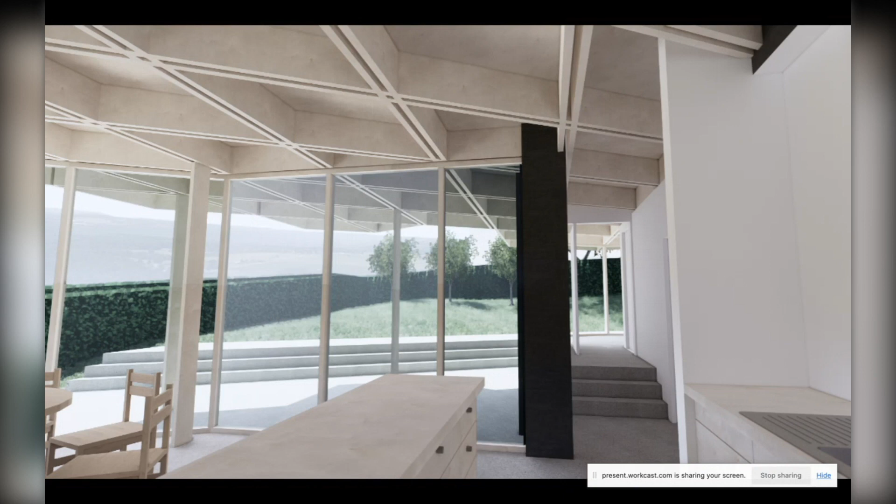The biggest feature, I suppose, is the roof - a 4-way reciprocal timber roof. We should be fed up of reciprocals by now, but we decided on at least one more 4-way reciprocal roof, where the elements were pretty simple Kerto beams that he could organize the CNC cutting himself.

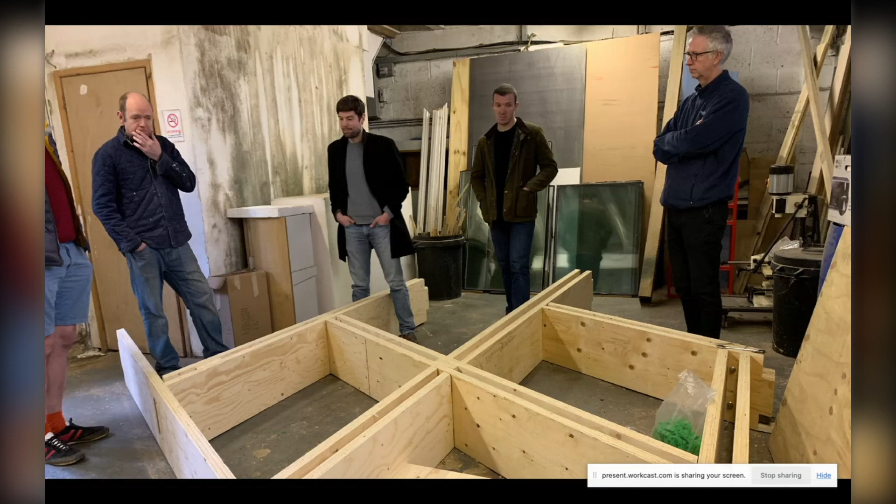We did the full 3D model, all the elements labeled, exported, all cut. There was all sorts of testing and test fitting, and it's taken years to build - not for any fault in the design.

It's just become apparent that for the client, the self-builder, a reciprocal structure is not an easy one to get your head around. It's taken him a while to get his head around, and he had to enlist external help. So for him, it's been a real tough learning process - as much as we can pull together cutting patterns, instructions and do test fits, for him it's actually proved to be quite a complicated undertaking.

So there are some good sides to the democratization of building via computational design, but I think we need to be aware that if we go down this route, there are still human beings at the end who have to build it. And I think that's the end of my talk. Thank you for listening.